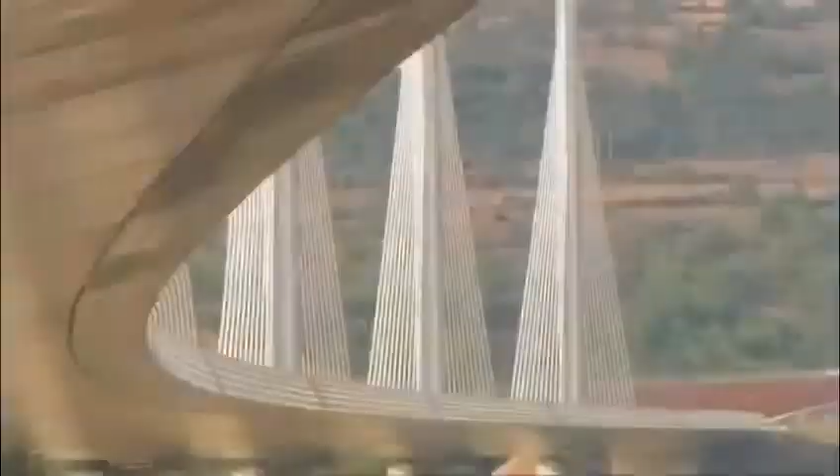This is the Millau Viaduct, the tallest bridge in the world. Its highest tower stretches a staggering 343 meters. So high, the bridge glides above the clouds. But this is a megastructure they said couldn't be built. When I've shown first the drawing of this bridge, they really thought I was crazy.

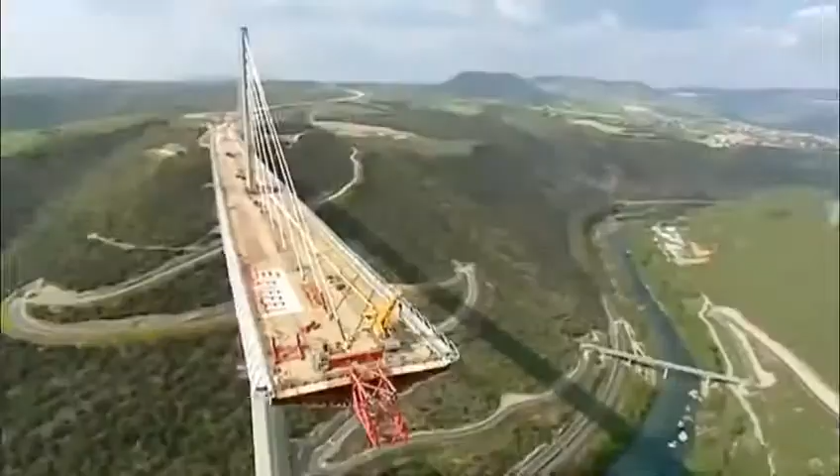The team attempting to build this amazing freeway in the sky had to survive landslides, fight winds gusting at 130 kilometers an hour, and weather massive storms as the bridge simply hung in the balance. It's a bridge that pushes the boundaries of engineering to the limits, and then beyond.

Imagine building a series of Eiffel Towers, then slinging a 4-lane highway between them, all the way across one of the deepest valleys in France. Impossible though it sounds, that pretty much describes the building of the Millau Viaduct.

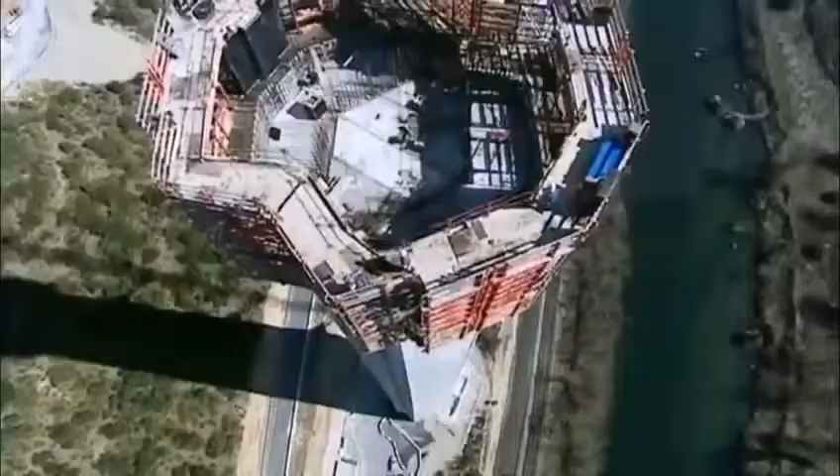From the start, the construction team faced 3 daunting challenges. 1. Build the tallest bridge piers in the world. 2. Put a 36,000-ton freeway on top of them. And 3. Erect 7 steel pylons, each weighing 700 tons.

And what's more, they had to do this hundreds of meters above solid ground. So high that if you were on top of the Eiffel Tower, you'd still be looking up at this awesome bridge.

October 2001, the team break ground. They're required to build a bridge that'll last for 120 years. And to win the contract, the teams promised to build it in record time, less than 4 years. By comparison, the world's longest suspension bridge, the Akashi Kaikyo in Japan, took a full 10 years to build.

To up the ante, any delay will cost them $30,000 a day in penalties. There are 7 piers that are numbered from the northern end of the valley. Number 1 will pose problems because of the steep slope. Number 2 will be the biggest challenge since it's the tallest. Crossing the river, number 3 is not much shorter. Then 4, 5, 6, and 7 climb the gentler slope to the south.

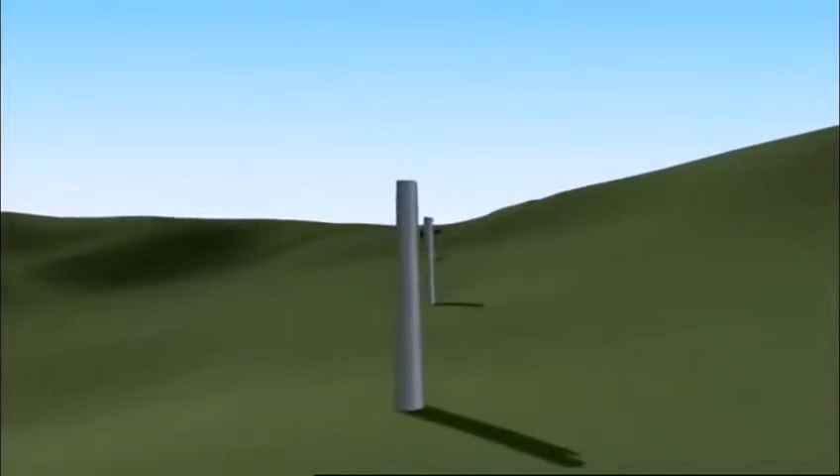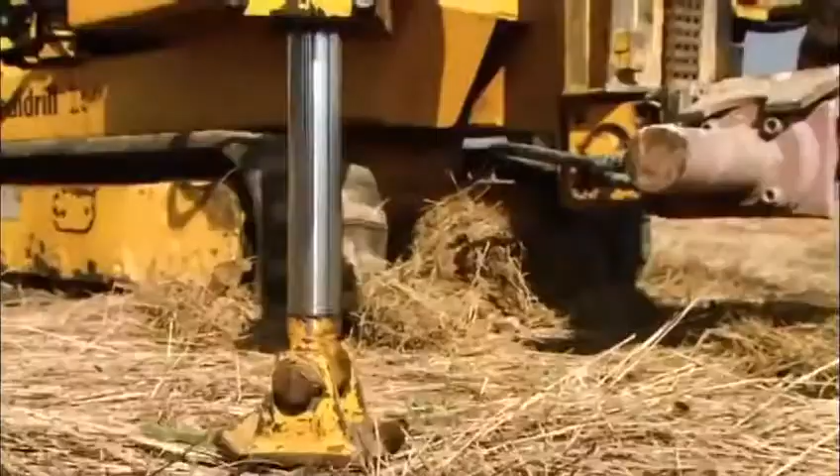To begin, the team had to bury the foundations deep in the bedrock in order to support the enormous weight the bridge will place on them. But the forces of nature were stacked against them. Geologists have warned of the risks posed by the region's fractured limestone. The rock is full of cavities that are essential to the local cheese economy.

These cave systems, close to Millau, are home to a unique bacteria responsible for the blue mold in the world-famous Roquefort cheese. But what's perfect for cheese could be disastrous for a megastructure. The geologist's diagnosis spelt one thing: landslides. This kind of catastrophe could jeopardize the entire project. Despite the warnings, building went ahead as planned.

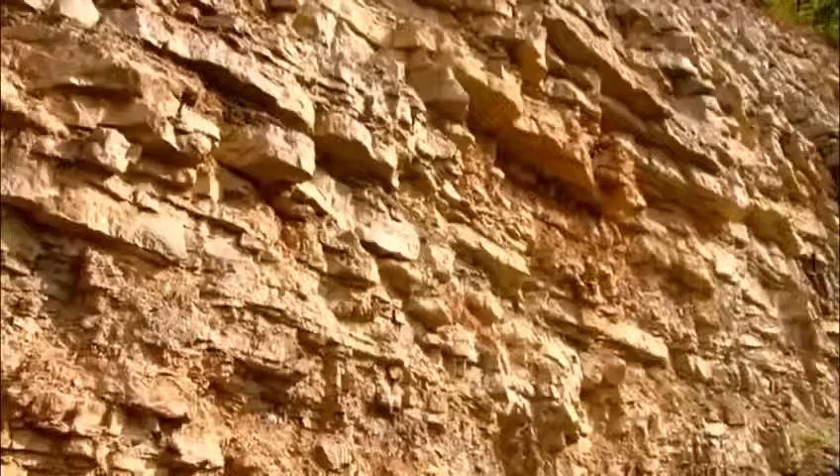Then, well into construction, as predicted, a dramatic storm causes a landslide. 4,000 cubic meters of rock collapse around Pier 1. Fortunately, the fallen rock doesn't damage the pier, but the warning is clear. They're forced to divert precious manpower and equipment to stabilize the slope and prevent a repeat collapse.

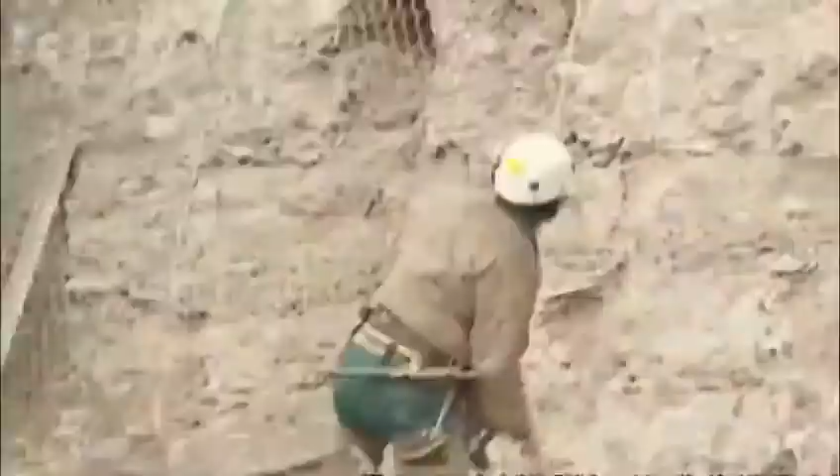So if the area is prone to landslides, why did they build the world's tallest bridge here in the first place? The answer is simple. In the 1980s, France built a freeway linking Paris directly with Spain. This major artery headed south across the French countryside, while from the Mediterranean, the freeway headed north, until they both hit one of the deepest valleys in France and stopped dead.

Welcome to Millau, France's least favorite bottleneck. The town of Millau is in the mountainous region of the Massif Central, one of the most tranquil parts of France. But in summer, this poor medieval town suffered traffic hell. The locals couldn't take it anymore. Neither could their mayor. It was terrible for our reputation. When you hear every day on the television and radio, avoid Millau, there's a traffic backup, a 5-hour wait in Millau.

And it's not just the people of Millau. Two drivers, Jamila and Jemima, crossing the 30-odd kilometers between the freeway on either side of Millau, reveal exactly why this bridge is needed. Jamila, in car 33, will cross the new bridge, while in car 22, Jemima will take the old road across the valley floor.

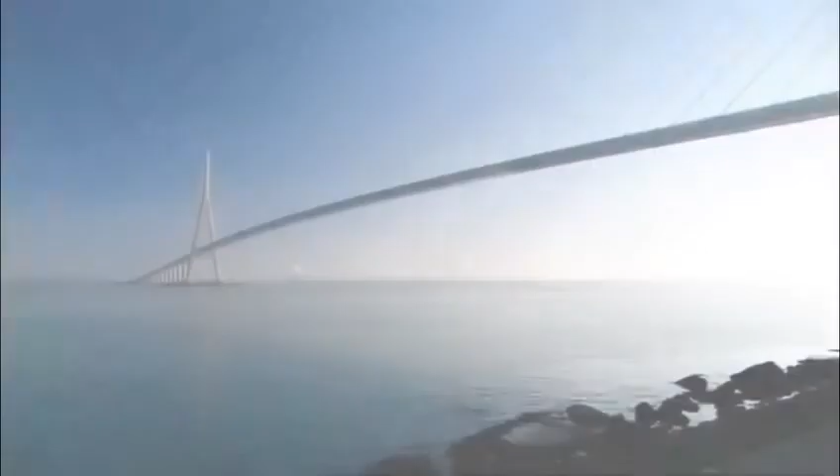12 years before construction began, up in Paris, the Ministry of Transport first came up with a plan. Their head bridge builder, Michel Virlogeux, is no ordinary engineer. He's a man who thinks big, very big, like the Normandy Bridge in northern France, the longest cable-stayed span in the world. With this record-breaking structure completed, Virlogeux was on to his next, Millau. His plan, another cable-stay bridge, but pushing the technology beyond anything previously attempted, with piers 4 times higher than the Normandy Bridge.

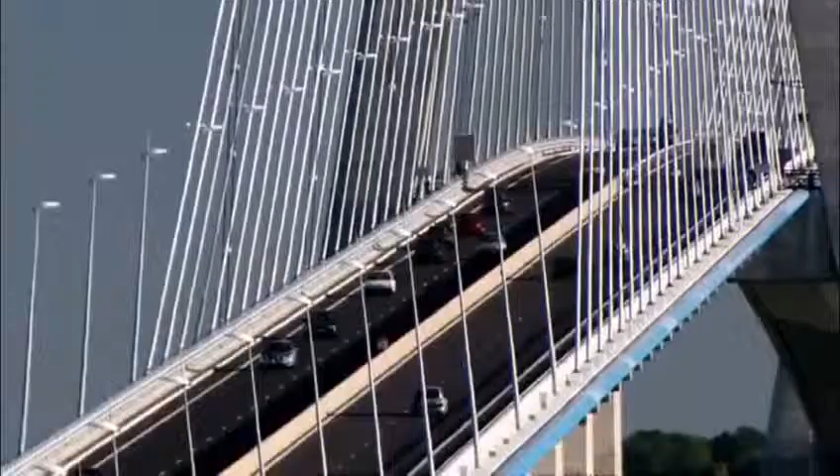The Millau Bridge would not only be the world's tallest, it would be unlike any bridge ever constructed. When I first showed the drawing of this bridge to the authorities, they really thought I was crazy. Virlogeux's Normandy Bridge has 2 sets of cables supporting the deck. But he wanted to up the stakes for Millau by losing 1 row of cables, so the remaining line would be forced to do twice the work.

More dramatically, the 2.5-kilometer Millau Bridge, instead of having a single main span, needed a whole series of piers to support it across the valley. No bridge builders had ever attempted a multiple-span, single-line cable-stay bridge on this scale before. The French authorities had a problem. Nervous about Virlogeux's groundbreaking scheme, they held a competition inviting other engineers and architects to compete with different designs.

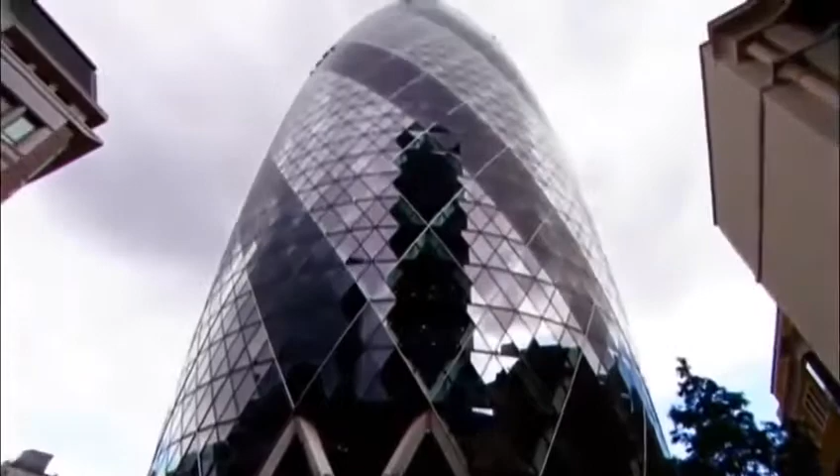The winner, Lord Norman Foster, is one of the world's superstar architects. In Hong Kong, he built the world's largest airport terminal. In Barcelona, offices literally hang from a mast on his communications tower. This is a man who regularly contemplates the impossible and delivers. You know, it's the challenges, and it's one challenge on top of another, on top of another.

And with Millau, one of the biggest challenges was making it fit into the landscape, given it's just down the road from the famous Gorges du Tarn, France's equivalent of the Grand Canyon. How do you make something which has to be so immensely strong against the forces of nature look very gentle, very delicate? How do you weave something on that scale into the most unbelievable landscape?

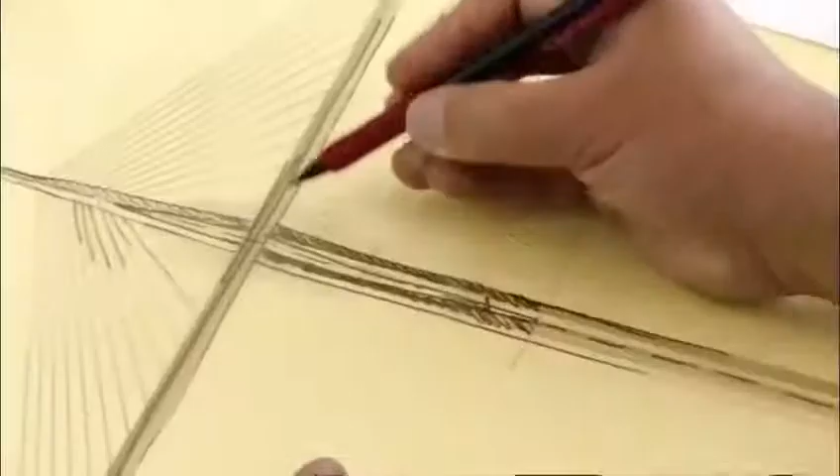Ironically, Foster's answer was to take Virlogeux's pioneering scheme, then push it one stage further. He turned an elegant piece of engineering into a delicate work of art by boldly cutting out 2 of the 9 original piers and seriously slimming down the remaining piers and road deck. Foster wanted the bridge to appear as delicate as a butterfly, but this butterfly has to support the weight of 5 Eiffel Towers in gale-force winds hundreds of meters above the River Tarn. Getting the design wrong would be a disaster.

Then, with Millau still on the drawing board, Foster's record as a bridge builder suffered a major setback. His Millennium Bridge in London is actually another record-breaking structure, the lowest profile suspension bridge in the world. But when this footbridge opened to the public in June 2000, it was a public relations disaster. Crowds walking over it set up a resonant frequency, and the bridge began to sway. As people adjusted their step to the small initial wobble, the effect was magnified.

Though it didn't threaten the structure, the swinging motion became so dramatic, the authorities closed the bridge for a refit that took 1.5 years and ended up costing over $8 million. It was a bad omen for the Millau Bridge, where construction was soon to begin. And at 15 times the height, a design flaw would be a catastrophe.

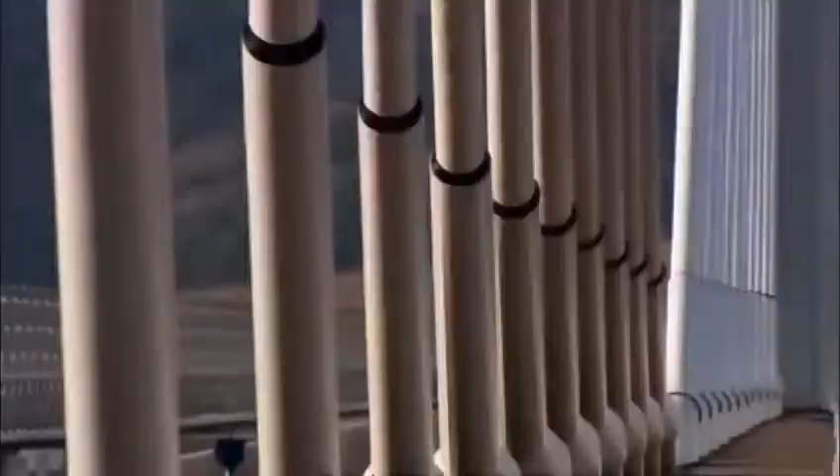December 2001, France's Millau Viaduct, the tallest bridge in the world, is under construction. Everything about this project is supersized. It'll need 200,000 tons of concrete, so much that the team have to build a concrete factory on site. But there's nothing straightforward about this concrete. The formula must be just right. It needs structural strength to support the massive loads it'll have to bear.

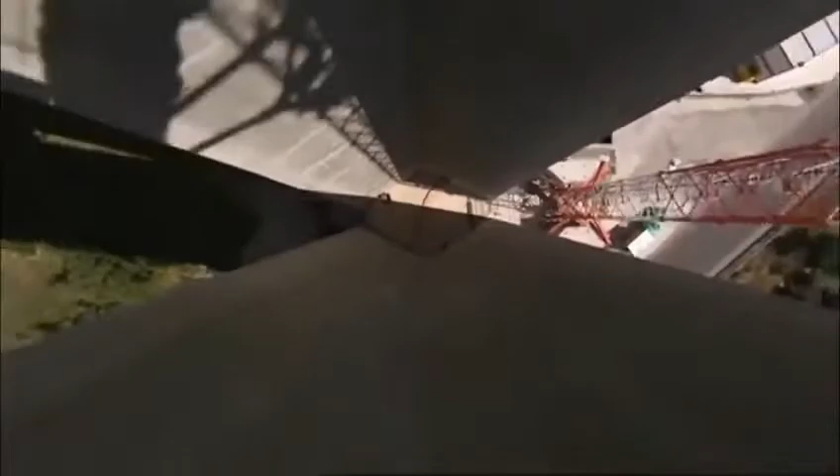But it can't set too quickly, as it has to be hoisted into position and poured hundreds of meters in the air. And it needs to be just the right color to suit Norman Foster's vision. In fact, the architect's vision has created a headache for the construction team. He's designed each pier as a complicated geometric shape, tapering the entire way up with vertical grooves set into them to create shadows. But what's just a line on paper for the architect was a major challenge to build.

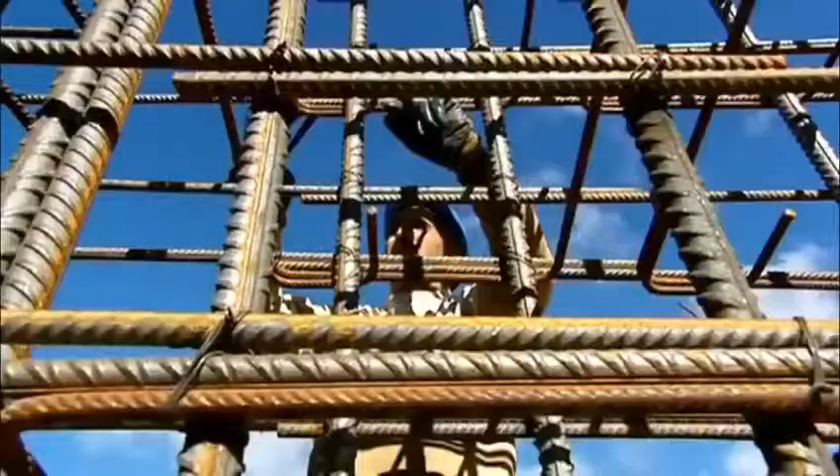The enormous piers are built step by step by pouring concrete into a temporary mold. To give the required strength, the molds are filled with a frame of steel reinforcing bars. In total, 16,000 tons of these steel bars are hoisted into place and secured. Laid end to end, they'd stretch the 4,000 kilometers from Millau all the way to Central Africa.

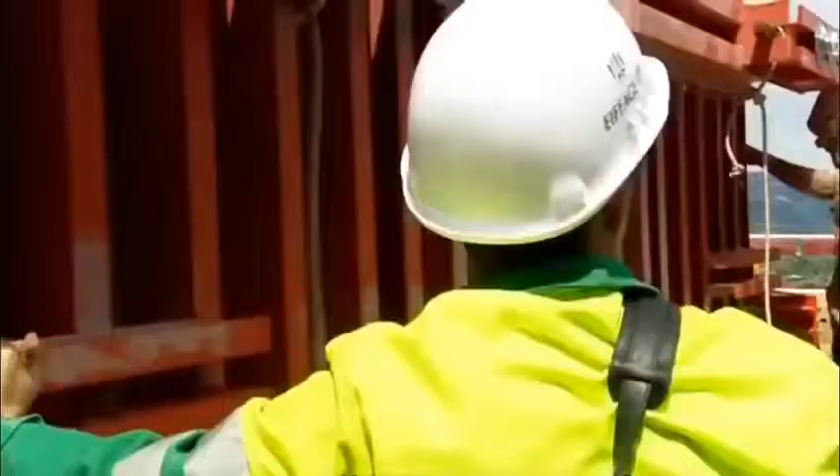The shape of each pier is seriously complicated. As a result, each time they remove the sections of red steel shuttering, they have to change the shape of the mold to fit the profile of the next 4-meter section. Manhandling these steel panels weighing up to 15 tons apiece is no picnic. And with the combined height of the 7 piers totaling well over a kilometer, they have to change the shape of the mold over 250 times.

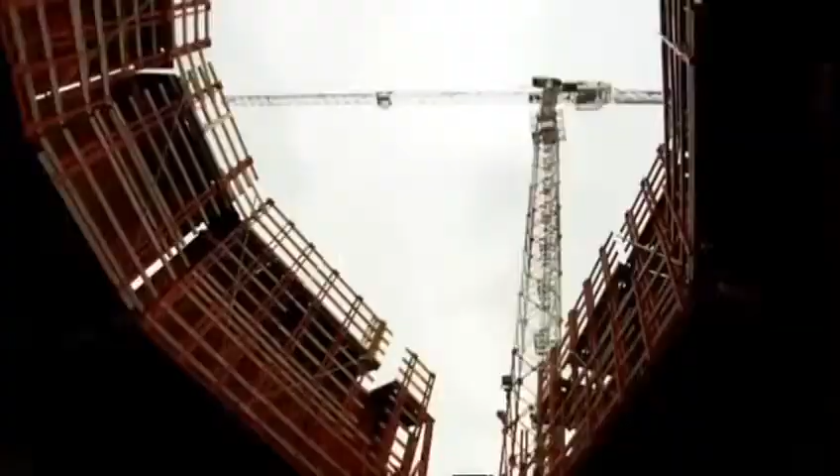Every 3 days, each team on each pier went through this whole cycle. Then they repeated the process. But it was a race against time, with a permanent threat of delay. Keeping the entire build on time and to budget was the daunting responsibility of one man, Jean-Pierre Martin. If instead of 3 days we took 4, imagine that multiplied by the number of castings. We'd end up with a 3 or 6 month delay. With a penalty of nearly $1 million a month, this isn't something Martin wanted to contemplate.

And this schedule wasn't his only headache. You have to be pinpoint accurate when you're building the tallest bridge piers in the world. Get it wrong, and the bridge simply won't fit together. Just 10 centimeters out, about a hand's width on each 4-meter section, and the tallest pier could be 6 meters off at the top, the width of a jumbo jet fuselage.

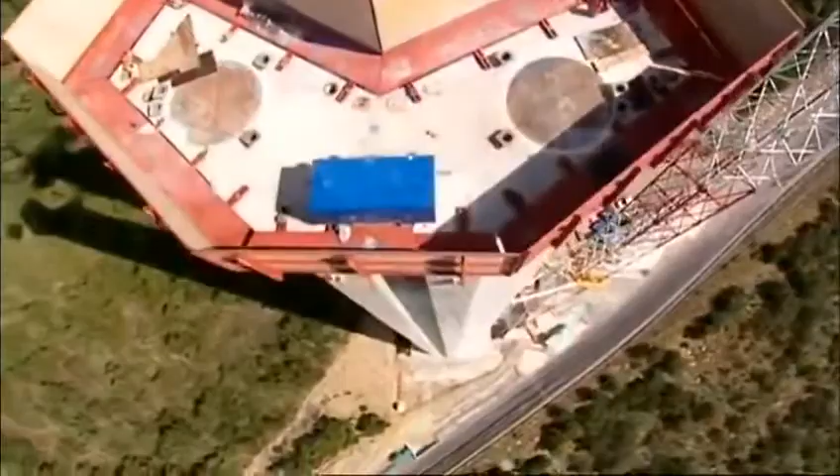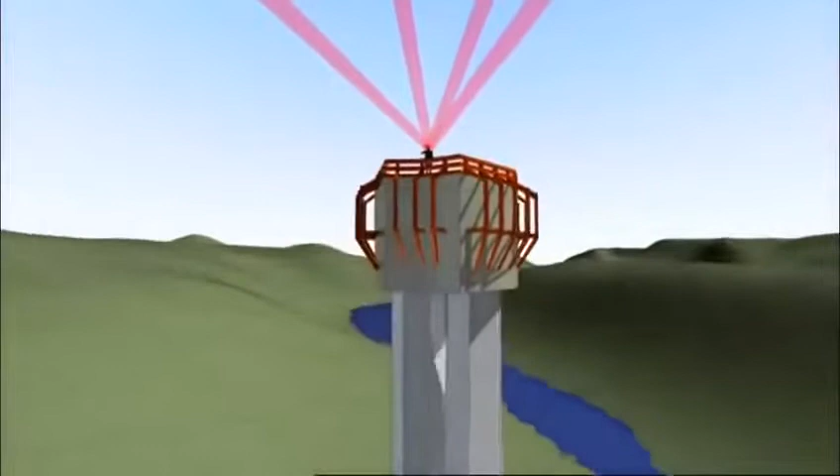Each team was aiming for a specific point in the sky. For Pier 2, this was exactly 245 meters above the ground, 546 meters from the north side, and 1,914 meters from the southern end. There was no room for error. The only chance they had to get it right was with GPS, accurate to within 4 millimeters. Using signals from multiple satellites, the team could pinpoint their position and make sure they're on target for that critical point in the sky they needed to hit.

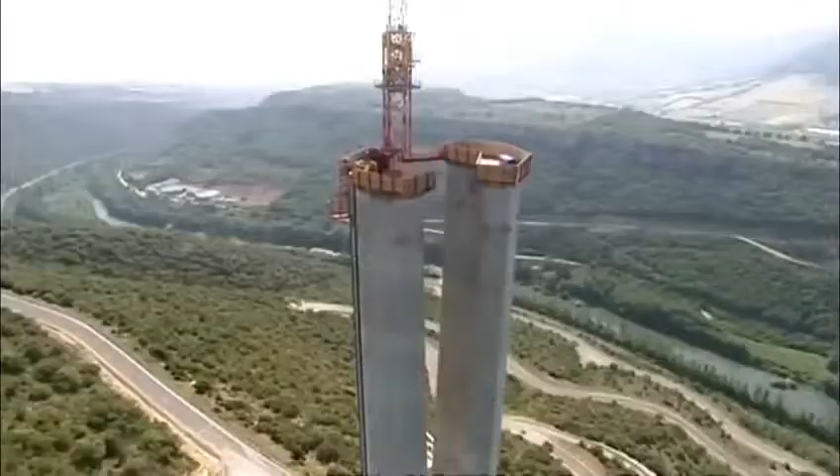Month after month, the piers climbed higher. Finally, by November 2003, they reached their full height. At 245 meters, Pier 2 becomes the highest bridge pier in the world. But is this record-breaking pillar where it's supposed to be? Amazingly, it's dead on target, to within 2 centimeters. Champagne corks pop. It's time for a major celebration. Against all the odds, they were 1 month ahead of schedule, but the team couldn't afford to relax. The next stage of the project would be the most difficult part of the build.

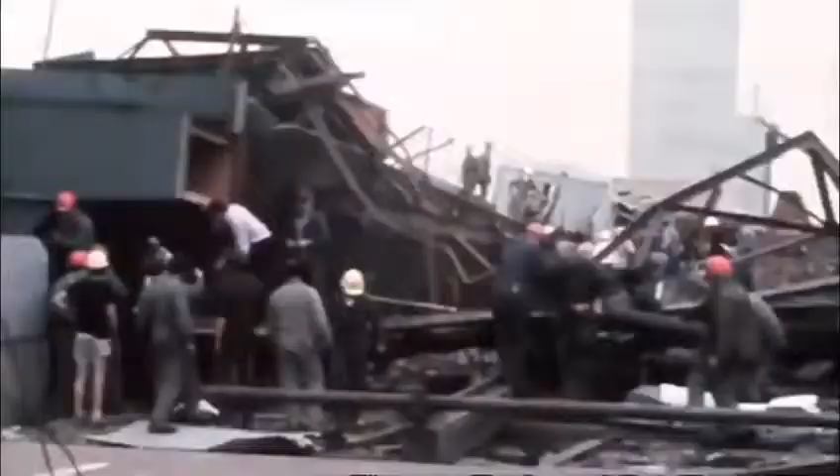Phase 2 of building the world's tallest bridge involved putting a 2.5-kilometer roadway weighing 36,000 tons on top of the piers, a full 270 meters above the River Tarn. Bridge builders know danger comes with the territory, but working at these heights can be lethal. More than 34 died constructing New York's Brooklyn Bridge. 35 died in 1970 on the Westgate Bridge in Melbourne, Australia. And 1 year later, 13 workers were killed when the Koblenz Bridge in Germany collapsed into the Rhine.

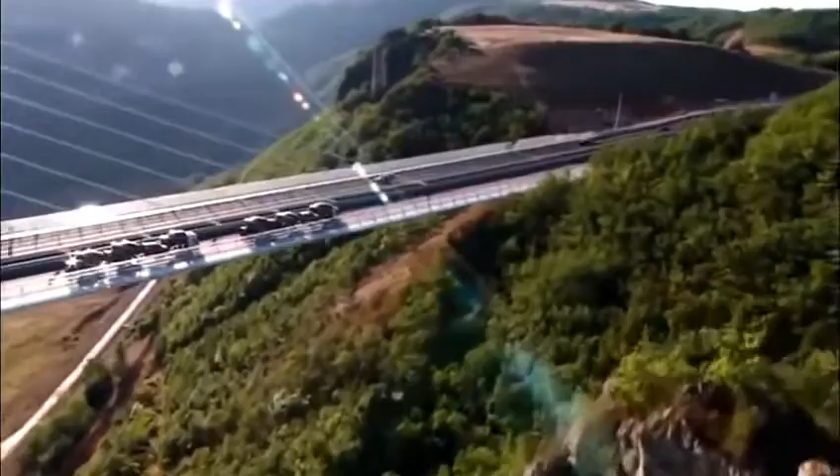With these fatalities in mind, the team decided to fabricate the entire road deck on the safety of solid ground. This meant building it in steel, which in theory would be much safer than lifting vast concrete sections hundreds of meters into position. There's only one problem with this plan. No one had ever put a road deck on piers anything like this height before, let alone over a 2.5-kilometer span.

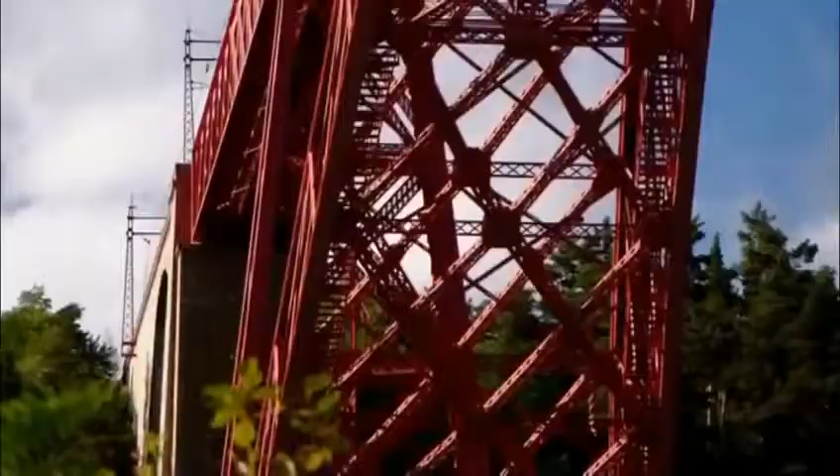In the end, only one steel manufacturer had the courage to take on this colossal challenge. Eiffel, the steel firm set up by the great French engineer. Eiffel built what was once the tallest bridge in the world, the Garabit Viaduct in southern France, before getting round to the framing for New York's Statue of Liberty and, of course, his signature tower in Paris. But despite the company's experience, Eiffel's director, Marc Buonomo, knew he was taking a serious risk. It was a gamble for the company, because if there had been a mistake, if it hadn't worked, it would have been the whole company.

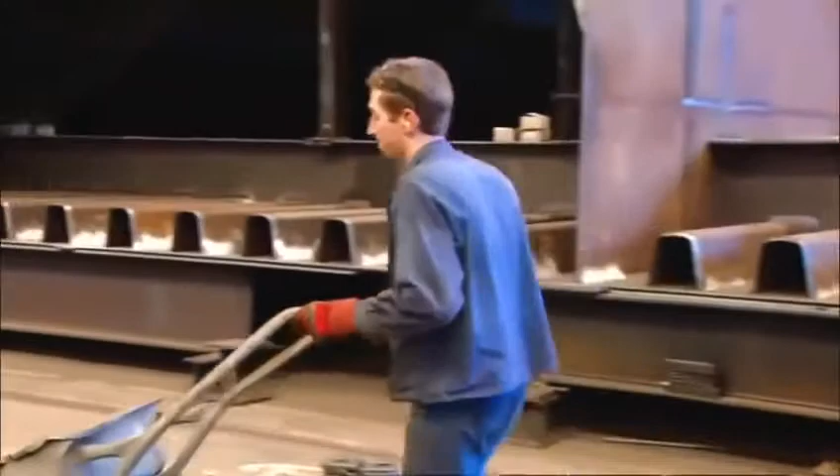They fabricated the massive sections that would make up the road deck in the company's steel factories. This immense jigsaw puzzle involved manufacturing 2,200 separate sections, weighing up to 90 tons and some of them 22 meters long. Their accuracy is measured with a laser to within a fraction of a millimeter. The huge square tubes are the central spine that should make the deck rigid. The triangular side panels will be welded on either side to create the width for a 4-lane highway.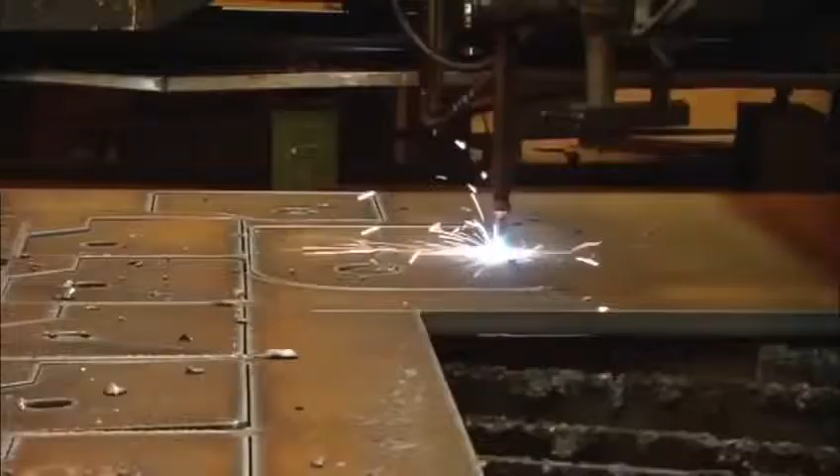To meet the punishing schedule, Buonomo automated the manufacturing with a 2-headed welding robot and a plasma cutting machine. Each cutting pattern or template is programmed into the computer. Then the machine automatically blazes its way through the steel. The torch reaches a scorching 28,000 degrees centigrade. That's 5 times the temperature of the Earth's inner core.

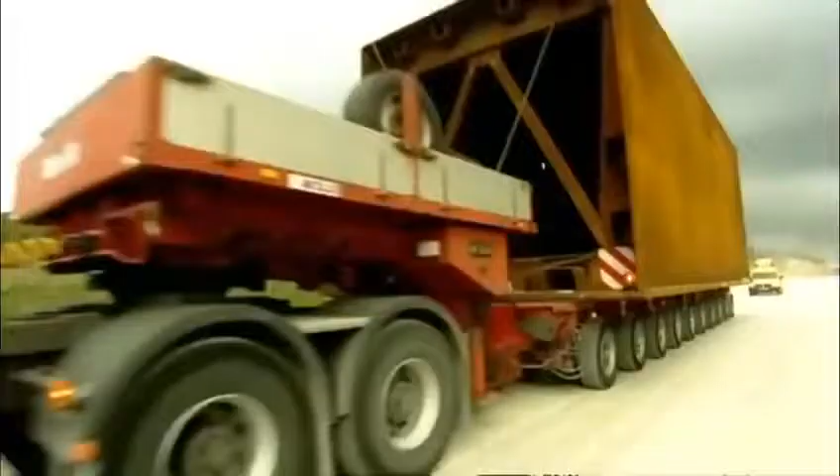But cutting and welding was the easy part. The hard part was getting these monster sections the hundreds of kilometers from the factories to Millau. The routes had to be planned with precision to avoid major damage. The police coordinated safety and clearances. Even with that level of preparation, some obstacles felt as if they're cutting it just too close for comfort. And this was no one-off event.

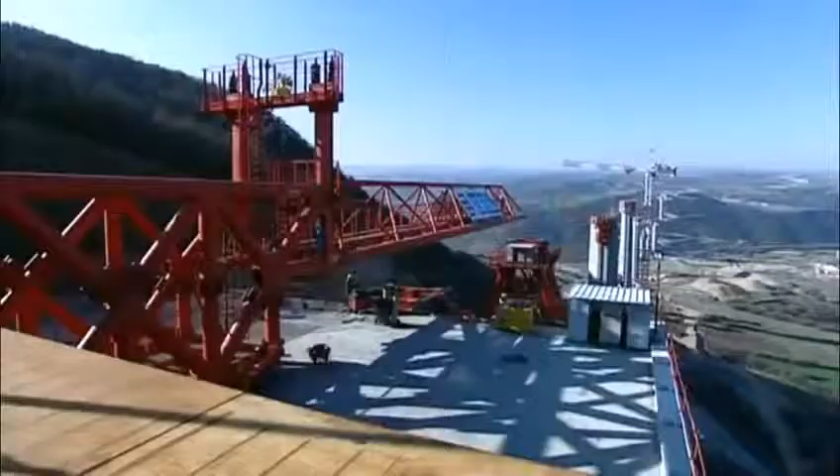Extraordinary road convoys. The components arrived at assembly plants set up, one on either side of the valley. Here, the pieces of a massive jigsaw puzzle were welded together to form the 2 halves of the deck. But getting these 2 halves to span the valley on top of the world's tallest bridge piers would be a major challenge. They'd be the first team to put a road deck on a pier taller than an 80-story skyscraper.

And pushing bridge building beyond anything attempted before, they planned to slide the entire 2.5-kilometer road deck over in 2 colossal pieces. The bridge's chief engineer, Jean-Marie Cremer, was one of the few people who believed it could be done. All the engineers who know this method, who were in the know, didn't believe it was possible. If the team had got their calculations wrong, the entire structure could collapse into the valley.

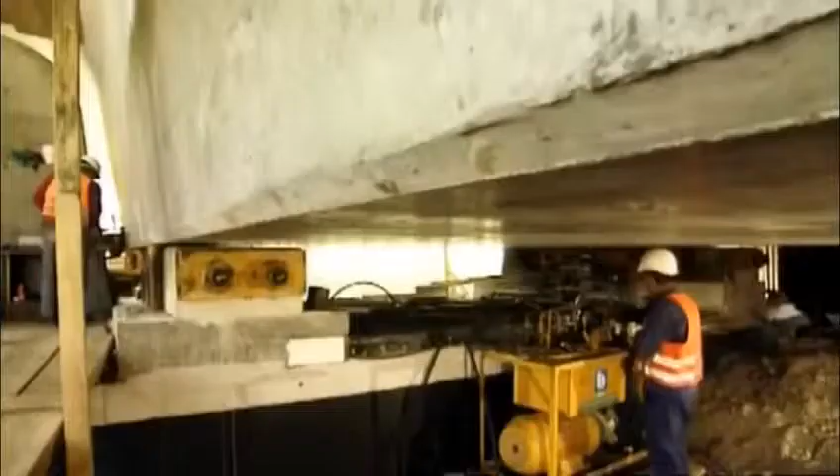We found a solution for the construction, which was to launch the bridge from the 2 sides. One part on the Larzac Plateau, one on the Rouge Plateau. And to push them from the 2 sides and to make them come and meet here above the River Tarn. Smaller bridges use a similar technique. A powerful set of hydraulic rams literally pumps the deck from one side to the other. But Millau would be the longest launch ever attempted over the highest piers in the world, and the results could spell disaster.

The deck is so slender, it would bend and collapse if it were pushed out over the 342-meter spans between each pier. The furthest anyone's previously managed is less than half that distance. The first part of the solution was simple. Fit a pylon so its cables support the front of the deck as it goes out over the valley. Then construct temporary steel support towers that halve the spans to a more manageable 171 meters.

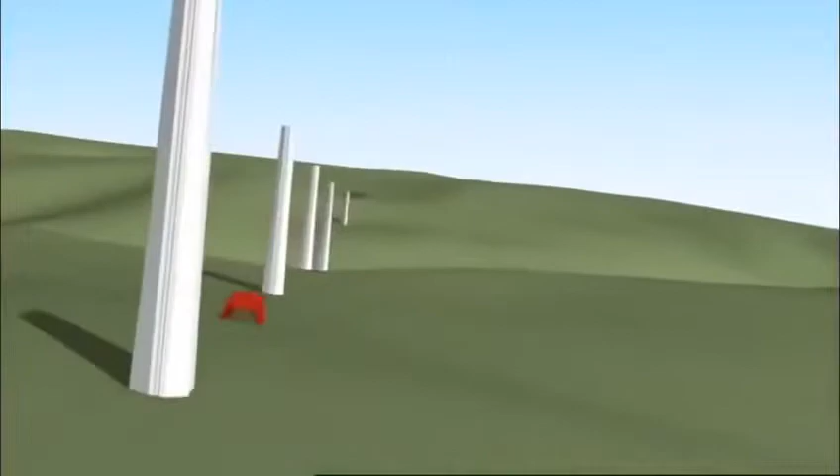These steel towers were a construction feat in themselves. The largest, over 170 meters high, is the tallest ever built, and they needed to carry a massive load: 7,000 tons as the leading edge of the deck, together with the first 90-meter pylon, slide over. And simply pushing this enormous weight over the top of the vulnerable piers would bring them crashing to the ground. This was the nightmare scenario. If we'd done a conventional launch, we would have knocked the piers over like the pins in a bowling alley.

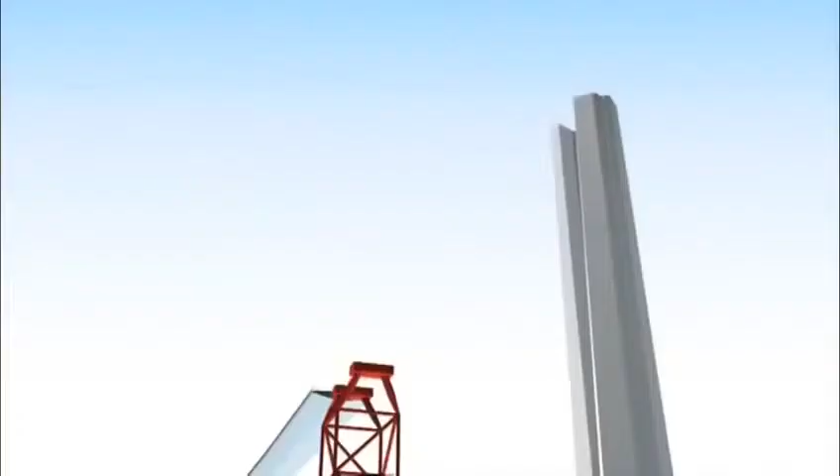Someone needed to reinvent the way this type of bridge is built. And it's Marc Buonomo with Jean-Marie Cremer who came up with the breakthrough. The basic principle can be demonstrated with a heavy box and a wobbly table.

With a normal launch, you knock over the piers. I want to advance the deck over the pier, but if I push the deck from here, I'd knock over the piers, because they're so tall.

The idea is to install a launching system on top of the pier, and that way, if I push the deck, it has no effect on the stability of the piers, and the piers won't fall over. The trick is to use a series of these launching systems to jack up the deck and inch it forward.

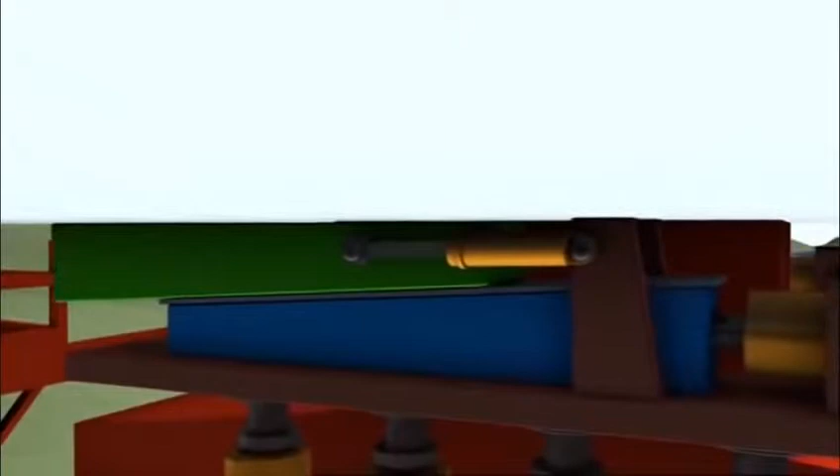Each system uses two wedge-shaped blocks under each side of the deck. The upper wedge is pulled forward by a hydraulic ram. It slides up the slope of the lower wedge at the same time, lifting the deck from its supports and advancing it 600 millimeters. The lower wedge then retracts, dropping the deck onto its supports. The upper wedge returns to its original position, and the whole cycle begins again.

4 of these clever devices are placed on each pier, all programmed to work at exactly the same time. The result is that together, they pick up the entire roadway and shunt it forward. But if one fails or gets out of step, it could spell disaster. The force could push the bridge piers apart till they collapse.

When you're up there and you see Millau 300 meters below you, you ask yourself, was this a good idea? The future of the entire project was now hanging on a prototype, and it had never been tested.

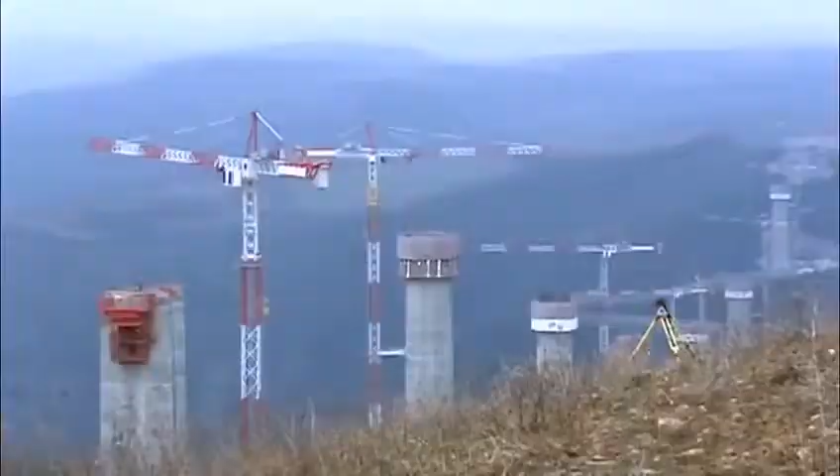It's the morning of February 26, 2003. Do or die day for the world's tallest bridge. Everything is about to be put to the test. The flexibility of the deck, the strength of the temporary piers, and critically, the pioneering hydraulic ram system. Even Buonomo, the man in charge of the launch, had his doubts. As it had never been done before, I have to tell you, I had fears that it wouldn't work.

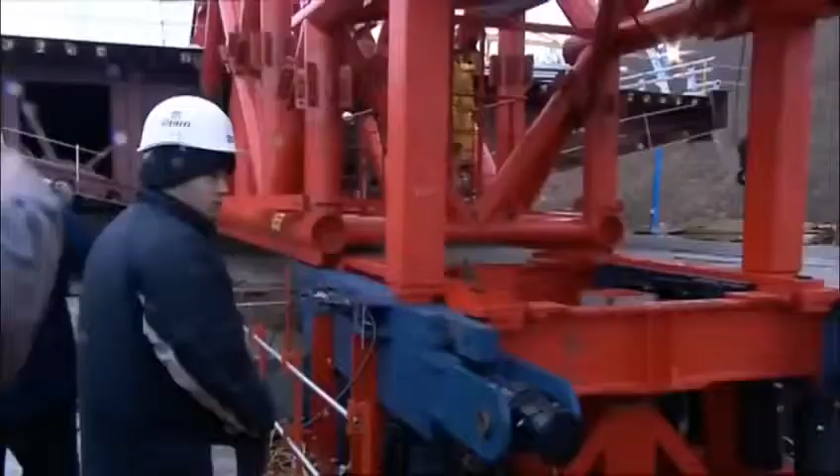The pumps kick in, the pistons start to push, and the deck begins its huge journey across the valley. The moment I heard the motors start, I put my finger on the deck, and I could feel my finger move. Every 4 minutes, the deck advanced 600 millimeters across the valley. Surveyors tracked its progress. But it was still a nail-biting time as they watched the unsupported deck crossing the void.

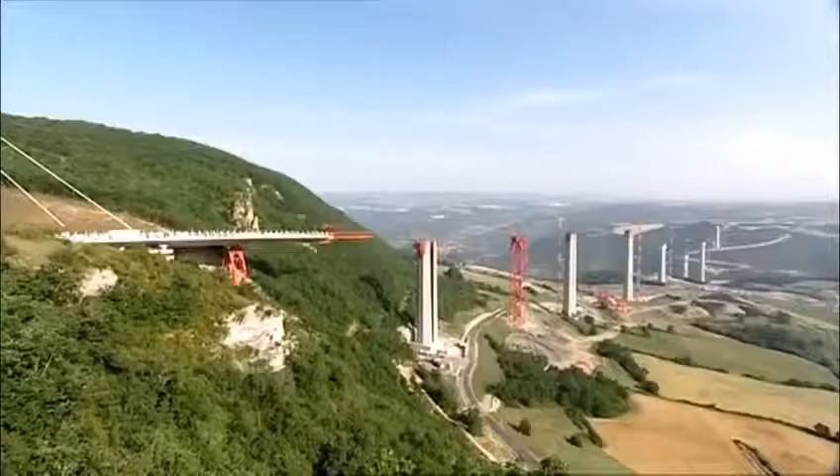Eventually, the deck reached the safety of the first pier. 204 meters down, only 2,256 to go. The launching system seemed to be working as planned. The engineers were feeling optimistic. But as the deck advances into space, it'll become more vulnerable to the wind, which can reach 130 kilometers an hour.

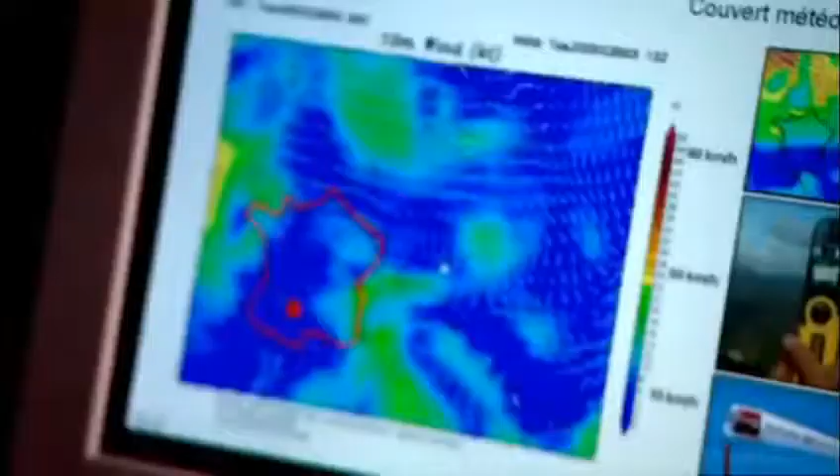Unfortunately, the road deck has the shape of an upside-down airplane wing, and the team's greatest fear is that this wing could simply take off. The engineers kept a close eye on the wind and weather conditions. When they were satisfied there was a 3-day weather window and the wind wouldn't exceed 85 kilometers an hour, they'd give the construction team the go-ahead, and the deck launch could continue. The reason for this precaution is simple. Strong winds can literally tear a bridge apart.

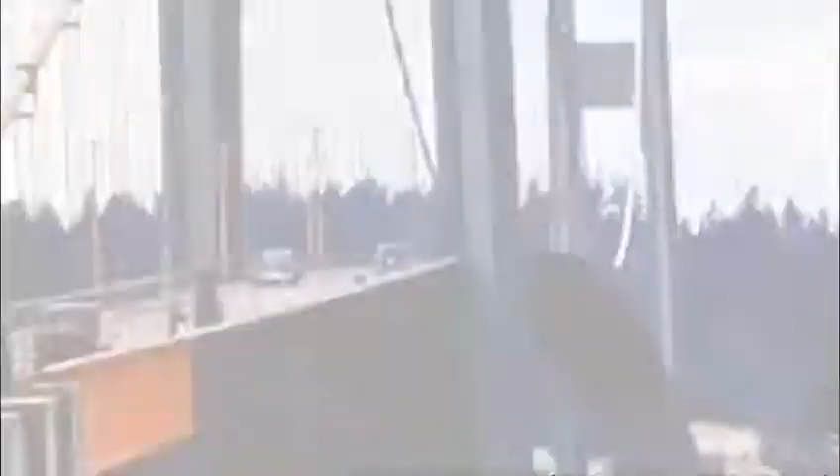In 1940, Washington State built a suspension bridge across the Tacoma Narrows in the US Northwest. It opened with a grand ceremony on July the 1st. But the celebrations were short-lived. The bridge had a major problem: the wind. Girders beneath the deck, designed to make the bridge rigid, actually blocked the wind, causing the roadway to ripple alarmingly. Locals soon dubbed it Galloping Gertie.

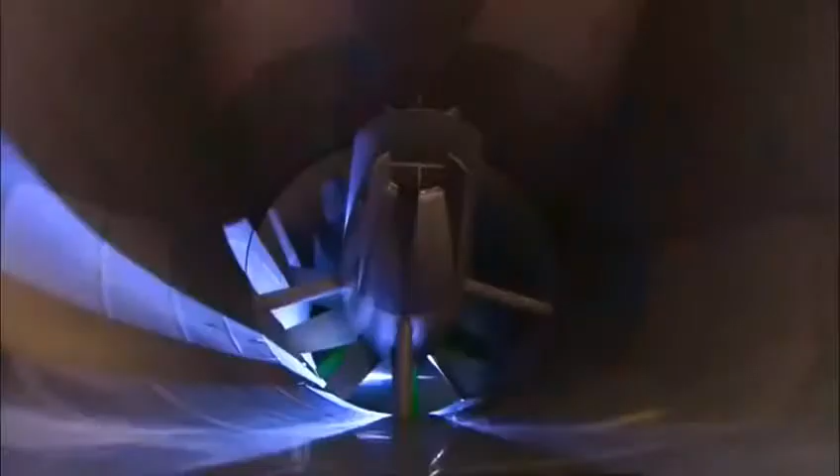On the 7th of November, with the wind less than 70 kilometers an hour, the bridge begins to twist violently. At 11 a.m., time runs out for Galloping Gertie. The wind sends the bridge crashing into the river. Wind tunnel testing is now standard procedure as a direct result of Galloping Gertie.

For the Millau Bridge, they analyzed the wind in the Tarn Valley over 18 months, then recreated those conditions in the wind tunnel. Wind engineer Olivier Flamand was shocked by the results. The average wind speed was relatively low, but because there's such strong turbulence, it created very fast peak winds. The rugged terrain creates serious turbulence at the height of the road deck. Winds peak at 130 kilometers per hour. That's hurricane force.

They tested every aspect of the bridge to analyze the risks: piers, pylons, and critically the deck. But it's not just the aerodynamics of the finished bridge. They needed to find out how it would behave when it was most at risk, during the launching of the deck.

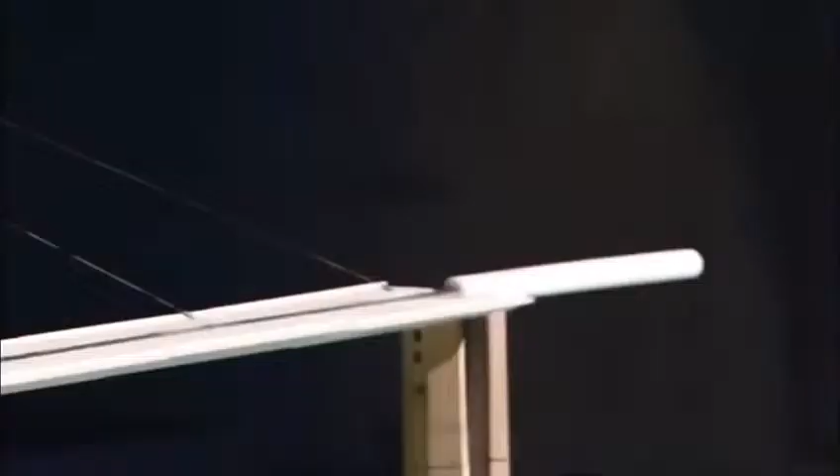Olivier and his team reached a chilling conclusion. The winds they've measured are strong enough to blow the unsecured deck off its supports and send it crashing hundreds of feet to the valley floor.

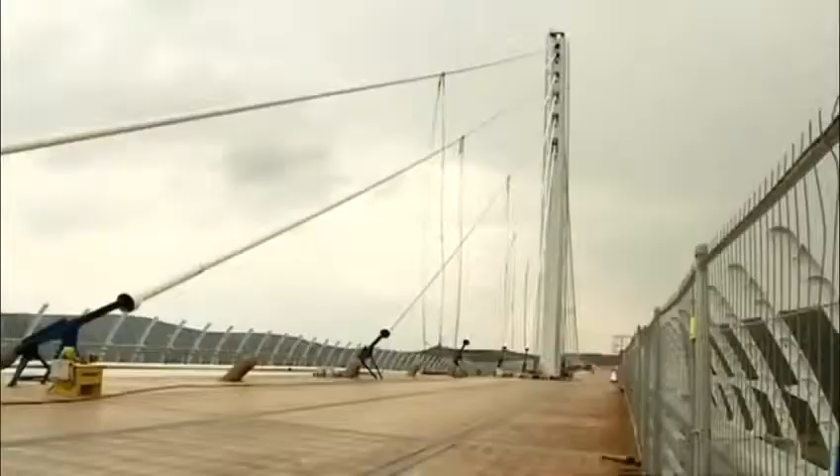And then the nightmare began. On the 22nd of August 2003, 6 months into the deck launch, one of the launch systems failed, leaving the deck hanging in the wind. To make matters worse, the weathermen were predicting storms.

So far, these massive pumping machines had worked perfectly. But the fact is they were prototypes, and due to the frantic schedule, they'd never been tested. The problem was that the non-stick Teflon between the sliding surfaces had ripped, and the friction generated was too much for the hydraulic rams to push against.

Unfortunately, no one had planned on replacing parts of this monster machine mid-launch on the top of a massive concrete pillar. This was very bad news for the man who staked his reputation on this system. It was maximum stress, like poison in your mouth. You don't forget that.

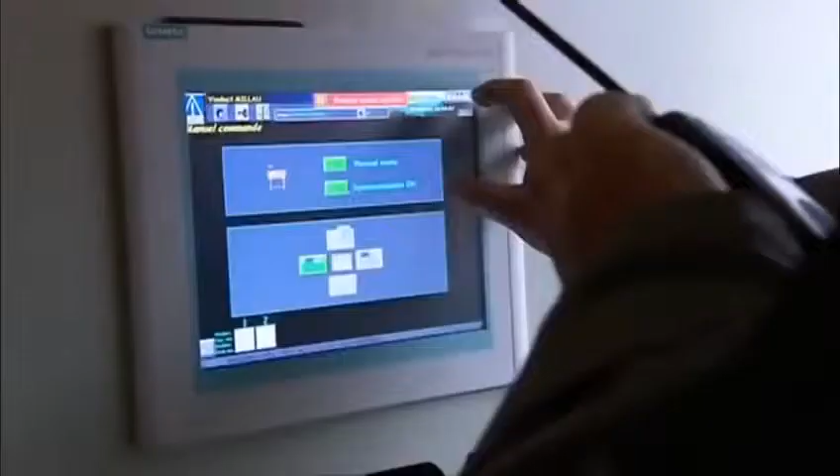Re-examining their calculations, they realized the cause of the problem. They'd underestimated the forces between sliding surfaces, but they wouldn't be able to repair it without the necessary spare parts. The clock was ticking, and Marc Buonomo needed a solution fast. When Apollo 13 came back with that incident, the NASA engineers requested they did the inventory of everything there was on board to know how to fix it.

The Millau team did an inventory. They realized that the other launching machines, not yet being used, could be stripped to provide the new Teflon surfaces they needed. Working all through the night, the team extended the access platform. This allowed them to take out the 5-meter-long, 2-ton steel wedges, replace the Teflon, and reassemble the launching machine. By 8 a.m. the next morning, it was ready to resume the launch.

The rest of the week, the predicted storms arrived, and another set of launching machines wore out. So when the deck finally made it to the safety of the next pier, the team breathed a major sigh of relief. You don't forget that. I won't forget that for 4 hours I was really scared.

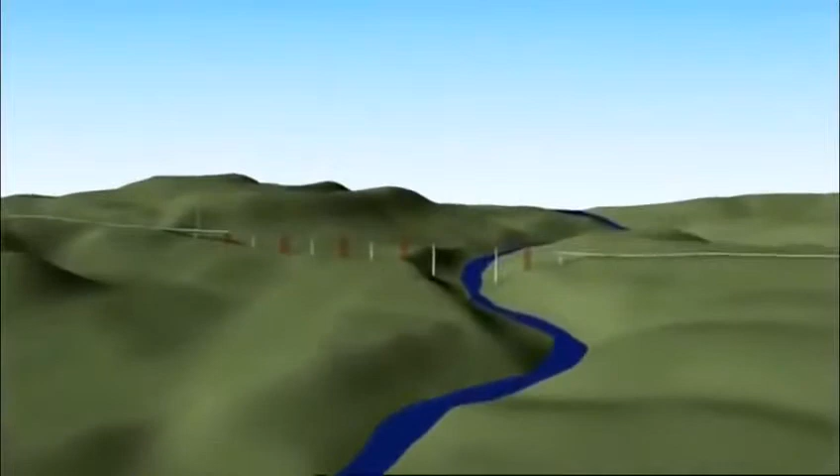The two decks continued their journey across the valley. Day after day, week after week for a full 14 months, they approached each other, millimeter by millimeter. By May 2004, they'd reached a critical phase. From the northern end, the shorter deck had traveled 717 meters into space to reach its final resting place. From the south, the longer deck extended over 1.5 kilometers. Only the section over the river, the one point where it was impossible to erect a temporary pier, divided them.

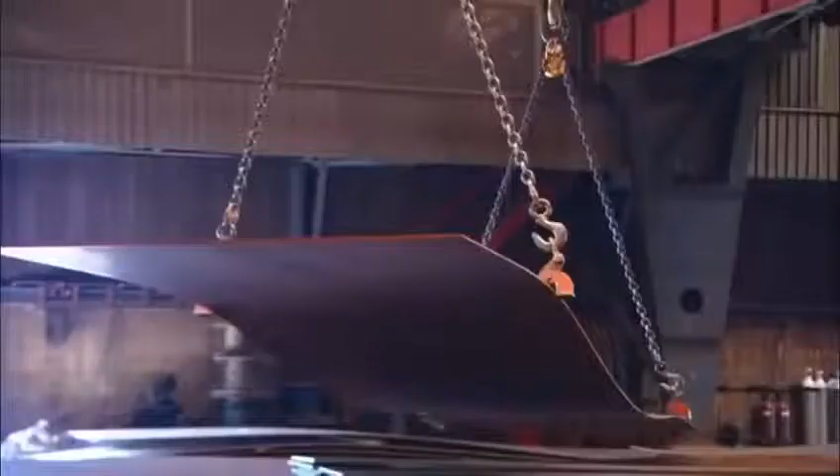Firstly, the two starting points on the northern and southern slopes of the valley are at different heights. Secondly, the bridge has a subtle curve to it. As a result, each steel panel which makes up the road deck had to be cut and welded with extreme precision. It would be an engineering triumph if they got these two sloping curved decks to meet as required.

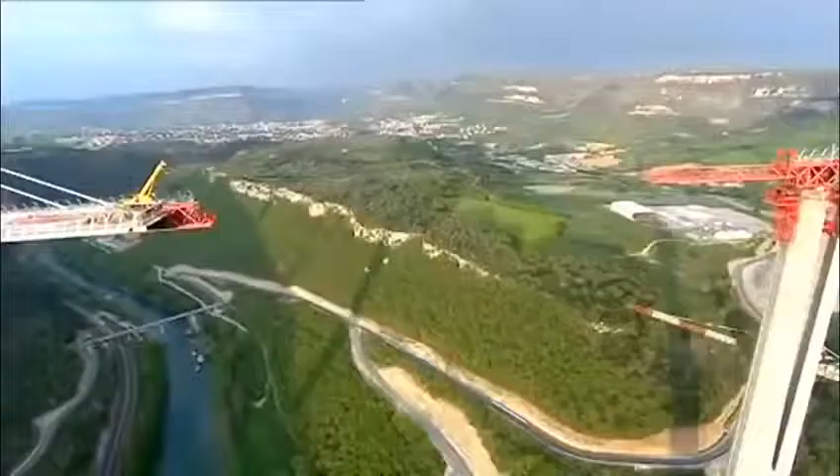The team checked the weather reports. With the wind inside safety limits, they gave the go-ahead for the final push. The rams began to drive the deck's leading edge off the safety of Pier 3 towards its destination. At this point, a total of 21 launching systems needed to move at exactly the same moment to avoid disaster. If anything were to go wrong now, the man responsible would be Marc Buonomo.

Everyone asked me, how can you be sure that it will go straight? So to be sure that they were going to the right place, I had a GPS put on the front, so I could see the gap between the theoretical and the real position.

Over the next 2 days and nights, the deck advances 600 millimeters at a time towards its final resting place. The world's media are watching the critical meeting of the decks. And to add to the pressure, the French Prime Minister is due to drop in to celebrate the event.

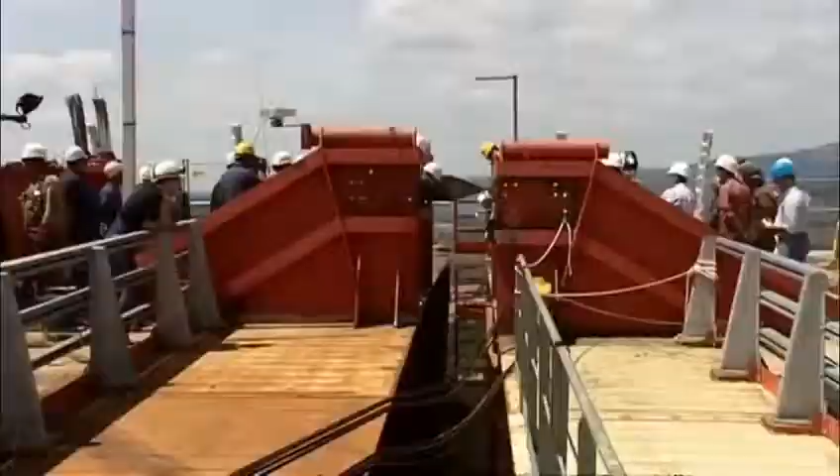The deck pushes forward, now with only centimeters separating the two sections. A magnum of champagne is hung between them to mark the moment. At last, union. The two massive steel decks have traveled high over this valley, a total of 2.5 kilometers, and when they check, they're aligned to within 1 centimeter. That's accurate to within 99.9999%. All the measuring, all the calculations have paid off. They've nailed it.

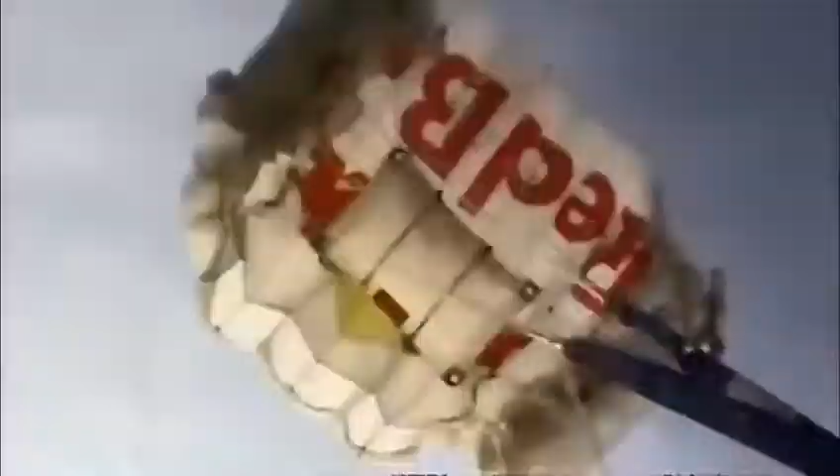The meeting of the decks was a special moment. News reports traveled round the world, and in Salzburg, Austria, they reached Felix Baumgartner, aka Felix the Fearless. Felix has made a career base jumping from some of the tallest structures on the planet, and within 24 hours, he'd driven to Millau and was calculating the logistics for the jump, factoring in his two main aims, to avoid arrest and death.

Baumgartner waited for darkness before arriving on site. He found his way to the base of Pier 2, then climbed an access ladder the full 245 meters to the top. He entered the steel road deck and found a place to hide until daybreak. He had to remain concealed until the sun was high enough for his cameramen to record his world record attempt.

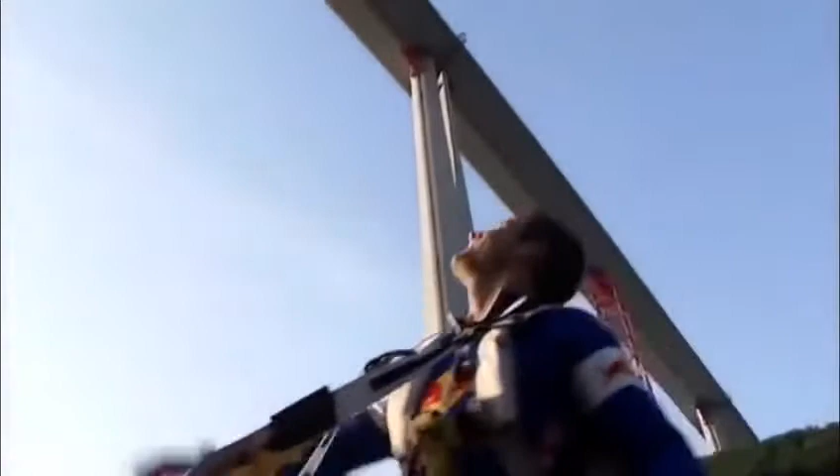At 7 a.m. the following morning, Felix the Fearless emerged. He took a cool backward flip off the tallest bridge in the world and entered the record books. The tallest bridge in the world, 250 meters. I did it. And having evaded death, he made sure he's not caught by the police.

The decks have been joined, and the team have reached the final phase of the project. But there was still a race to meet the schedule, and their problems weren't over yet. Everyone could see the dramatic undulations in the flexible steel deck. Even some hardened bridge builders wondered about its structural integrity. It was a huge surprise for everyone. All the engineers said, we knew steel was flexible, but not that flexible.

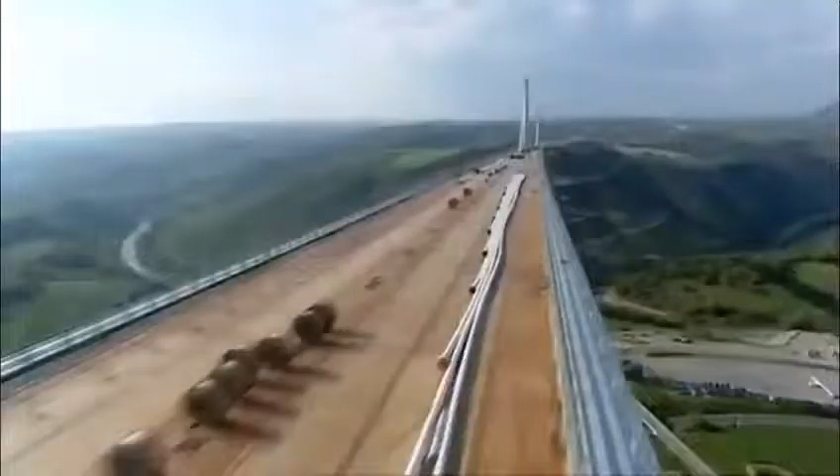The team were relying on the pylons and cables to pull the deck straight. Each massive pylon is 90 meters high and weighs 700 tons, the equivalent of 85 London buses. Placing them in position on the slender deck, high above the valley floor, would go beyond anything ever attempted. Once again, Marc Buonomo had a plan. You know, the first people to make vertical pylons were the Egyptians. Buonomo adapted a technique used in ancient Egypt to erect obelisks in the sands.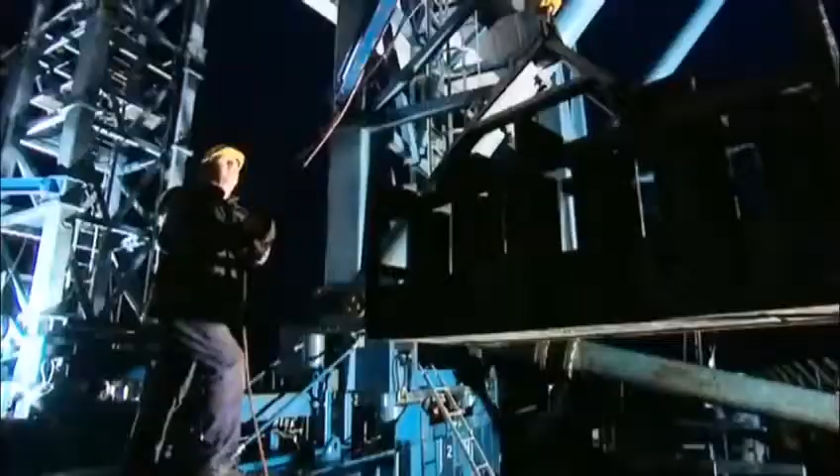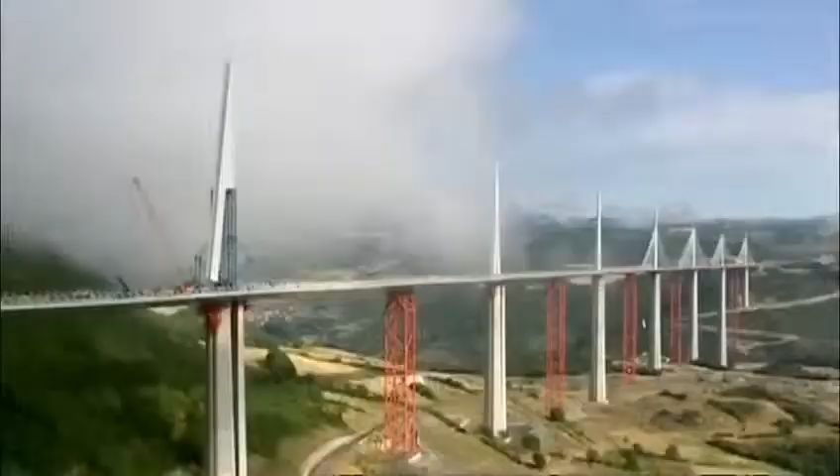On top of the road deck, the team put up two enormous steel towers, both of them secured by cables and equipped with a hydraulic system capable of raising 1,000 tons. The 700-ton pylon is then lifted by the hydraulics. As it rises, it pivots little by little until it's vertical. It's then lowered safely onto its anchorage point. Buonomo's 4,000-year-old technique worked to perfection.

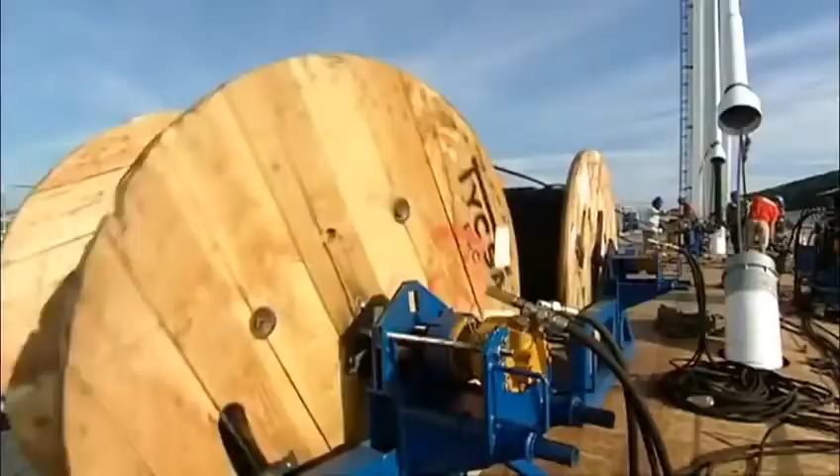With all 7 pylons in place, the team could attach the cable stays that would straighten the rippling deck and give it the strength to cope with full traffic loads. They hope. The weight of the roadway is now over 40,000 tons, the equivalent of a cruise ship, and the 154 cable stays should prevent it from sagging or collapsing. The strongest stays are made up of 91 individual steel strands and have a breaking strength of 2,500 tons, strong enough to hold back 25 jumbo jets, all at full throttle.

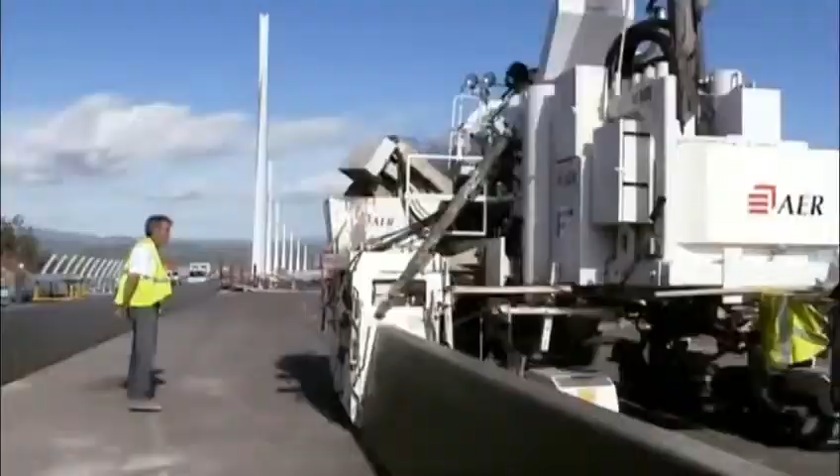As the cable stays are tensioned, true to plan, the ripples in the road deck are pulled straight. Over the 2.5-kilometer deck, the ripples are now no larger than the size of a thumb. They're finally on the home straight. The road surface goes on, adding a further 10,000 tons to the load. That's like driving 153 battle tanks onto the deck. But before it could open to the public, the team needed to know the bridge is safe. It would have to pass one crucial test.

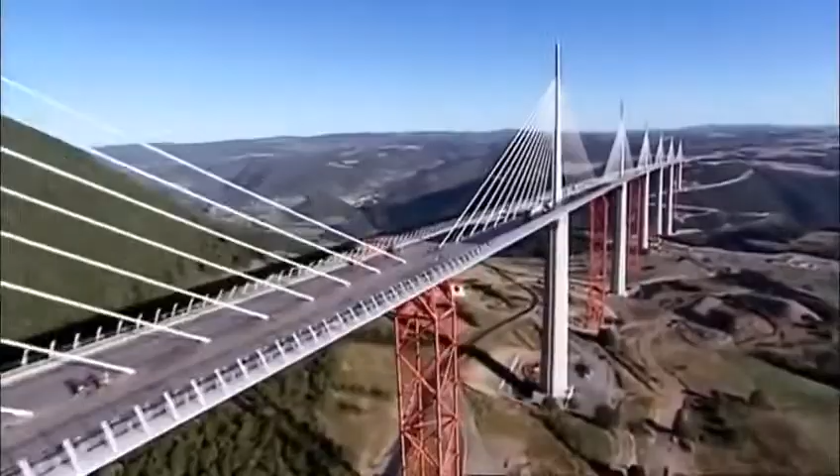After 3 years, the construction team building France's Millau Viaduct, the world's tallest bridge, are about to find out if they got their calculations right. On a single-span cable-stay bridge like the Normandy Bridge, a large load on the main section is no problem because the cables are attached to solid ground and can't give.

On the Millau Viaduct, with its 8 spans, the cables are attached to the deck of the adjacent sections. A load on one section will cause it to drop, pulling the stays down. As the pylons lean in, the matching stays are pulled upwards, lifting the neighboring decks and causing a dangerous rippling effect.

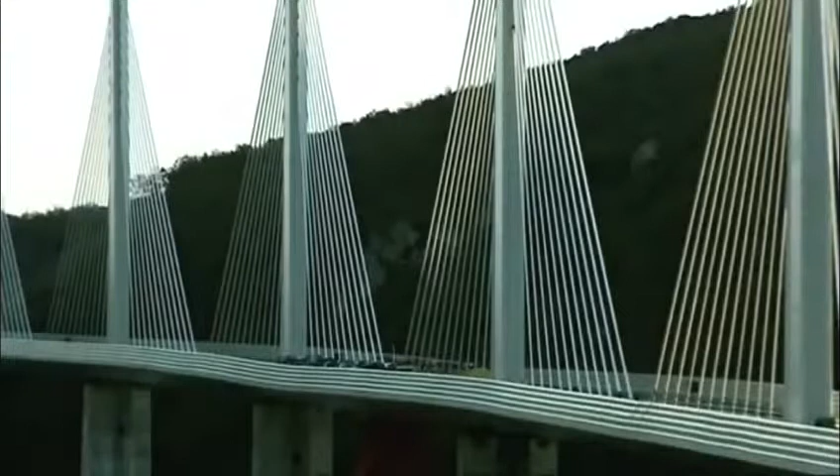It's right now the team put their bridge to the test. These 28 trucks have a combined weight of over 900 tons. They are now positioned in the critical point, mid-span. The engineers hold their breath. Measurements are taken. The span bends just 26 centimeters. This is a triumph for the engineers. The bridge was designed to cope with more than double that.

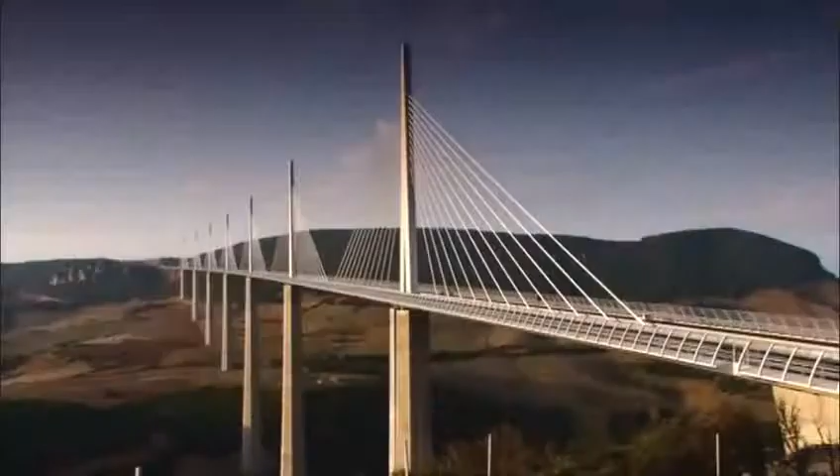4 weeks later, on December the 14th, 2004, President Jacques Chirac officially opened the Millau Bridge. A proud moment for the whole of France. Just over 3 years of construction have produced the tallest bridge in the world, designed to last at least 120 years. And against the odds, the project manager even brought the job in on time. But that's not what he's most proud about. What I remember, because on construction sites there are often accidents, is that we had no serious accidents, nothing more than a minor injury.

As soon as it opened to the public, the bridge was an instant success. But the real test isn't till its first summer, and the French all take their annual vacation. No one ever expected anything like this. Numbers peaked at more than 50,000 vehicles a day. At over $7 per car, that's great news for the construction company, who are clawing back their $478 million investment in the project.

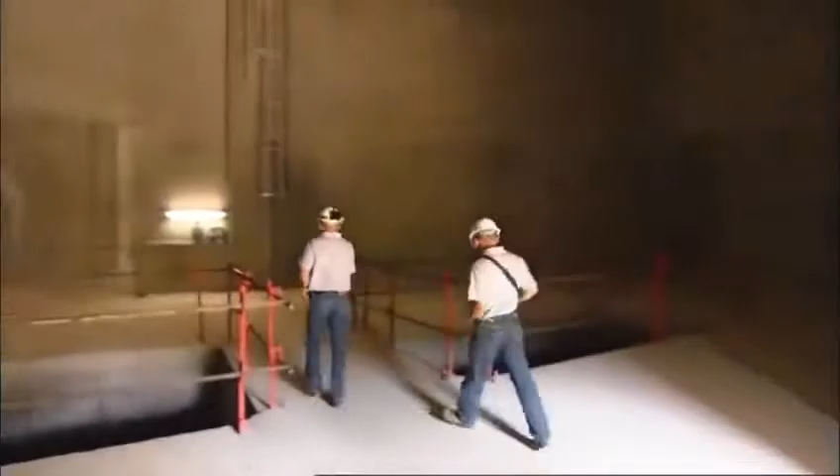This was an epic bridge to build, but it's just as epic to maintain. Thierry and Frank are assigned to P2, the world's tallest bridge pier. This structure is no solid concrete block. It's a series of vast hollow spaces. Their job today is to test the communication system and electric circuits on each of the 7 structural floors. This involves a 343-meter climb, going hand over hand up a ladder for the rest of the day. By dusk, when Thierry finally reaches the summit of the pylon, he may be exhausted, but there is a payoff. You get a fantastic view from here, a 360-degree panorama.

The tallest bridge in the world has become an icon. But this is creating problems no one had ever imagined. Locals have been taking over the bridge as a platform to get media attention for their causes. This crowd was hoping that driving sheep over this freeway in the sky would help them get more farming subsidies.

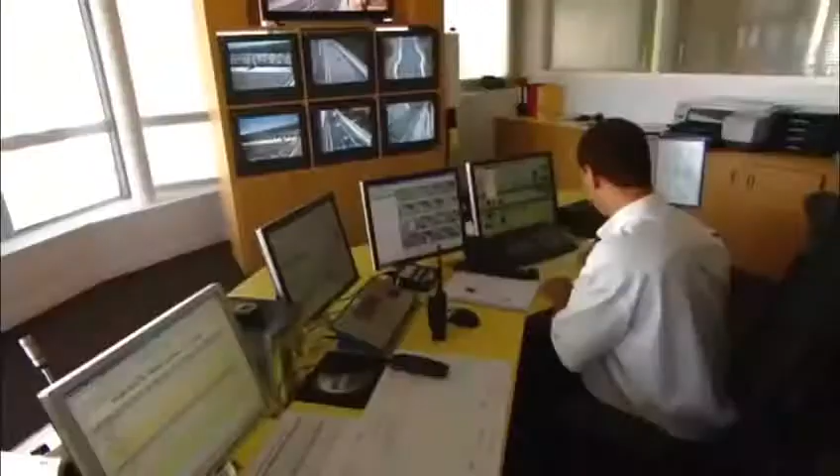Jose's job is to prevent this kind of incident from creating a danger, and on this bridge, the incidents keep on happening. An alarm triggered by a motion detection system means there's a stopped vehicle on the bridge. Immediately, Jose dispatches a colleague to deal with the situation. The last thing anyone wants is a multi-car pile-up on a 2.5-kilometer bridge, quarter of a kilometer in the sky.

Jose zooms in his camera to reveal the man has left his car and is sitting dangerously on the crash barrier. The driver's probably only broken down, but already one man who stopped climbed over the wind barrier and jumped to his death. Bruno intervenes. Thankfully, it's no more than an irresponsible photographer who's sent on his way.

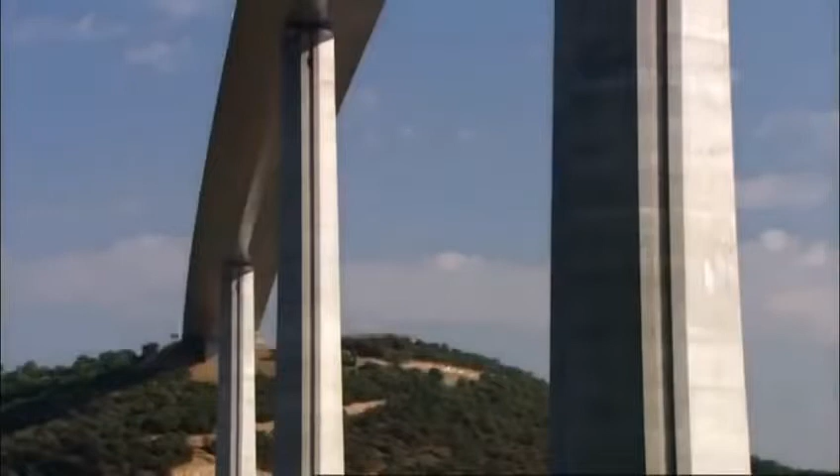You could say the Millau Bridge is a victim of its own success. It's definitely become a major tourist destination. 700,000 visitors in the first 9 months. Fortunately, most of them wait till they're off the bridge to take their photos. It's magnificent. I came 600 kilometers today to see the Millau Viaduct. There's only one thing to say. It's extraordinary. They're drawn because it's a world-beating structure, but also because it's incredibly beautiful, delicate, and minimal. Not what you'd expect from a structure that's nearly a third taller than any other bridge on the planet.

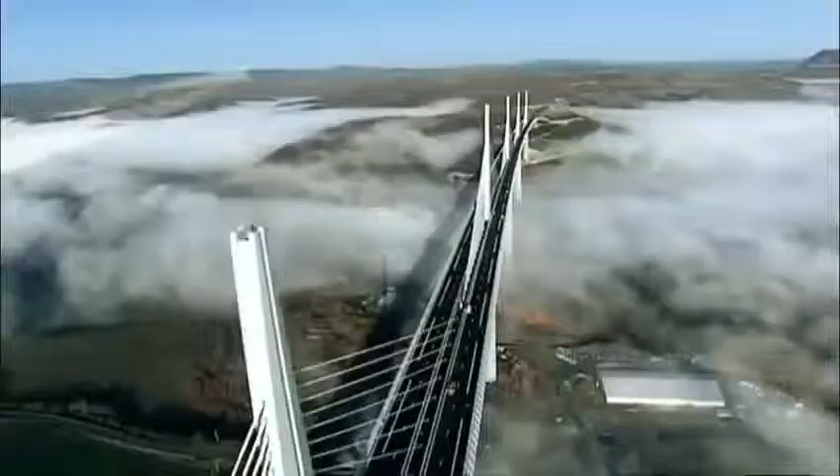And architect Lord Norman Foster's achieved his aim to give the driver the sensation of soaring. As you leave these plateaus, you do fly. You fly across this bridge. Literally, you are above the clouds. And the result certainly pleases the man who dreamt it all up. To see erected this bridge, which I imagined 15 years ago, it's something magic. This is the longest pure cable stay bridge in the world, the tallest roadway in the world, and of course at 343 meters, it is the tallest bridge ever constructed.